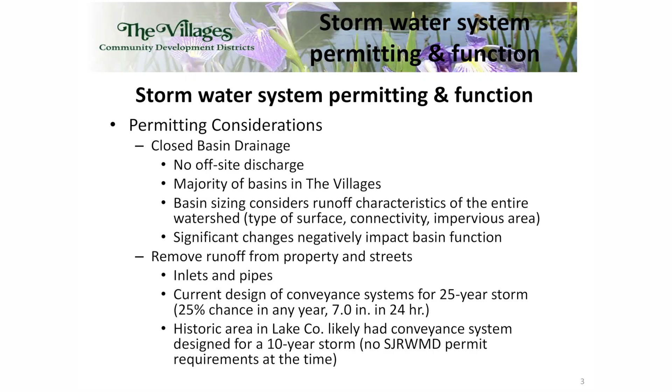The historic part of the villages in Lake County was designed and constructed back before the Water Management District even had standards for conveyance systems. So the belief is that those systems were designed for about a 10-year storm. Because there weren't standards, that was the practice of that day. So those older systems can behave a little bit differently, not because there was anything wrong. It was just back in the 70s, and the way things were designed was just different.

Moving on to storage, the primary purpose of the storage is to protect properties from flooding. And so the way that those are designed is the engineering team will look at what's called a 100-year storm. That's a storm that has a 1% chance of occurring. So you could feasibly have multiple 100-year events in any given year. It's unlikely, but that is a storm that has about 10 inches of rain in about a 24-hour period.

Now, if you look at the St. Johns side, that's Lake County and also up in Marion County, it's a little bit different storm. It's a 25-year, 96-hour storm, and that's about 11 inches. So those are the amounts of rainfall that are considered when the basins are sized, so that if we have that kind of event occur, the retention basins will be able to store that water and not have any kind of flood impact on the properties within the community.

One of the things that does happen, that was a design intent: if the developer and the districts were to have built only what I'd call primary storage, those basins that look like the water retention system, if all of the storage was to occur in just those basins, they would have had to have been much, much larger. And so it would have completely changed the economics and the way that things were built and designed.

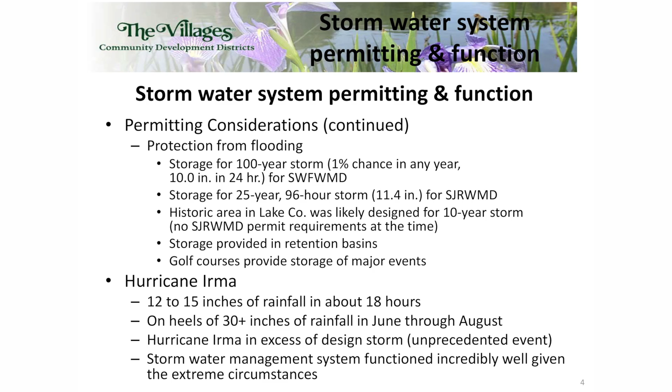So with all that, if you look around the community, if you were able to get out and see what occurred, the stormwater management system really functioned incredibly well. There was no widespread flooding. You saw some areas around the state where there was significant flooding that occurred on properties. As far as the district is aware, no water got inside the primary part of anyone's home.

There may have been some water right up next to someone's porch, but given the circumstances that occurred, it was really a very successful experience. The system functioned much, much better than it was even designed to do. So we were very, very grateful for that. The next couple of slides just show some pictures of what happened.

Basins were overfilled, right? They had overtopped the bank. And so that impacted plant material. One of the things as we've talked to the district is we're going to have to consider, when things are relocated, where's it going to be appropriate to replant materials? Where's a proper place to replant as we deal with some of the materials that were damaged through that event. It may impact the type of materials that are replanted in those areas.

And one of the things, kind of a side note, we're going to talk about water use permitting in just a minute, but when you're dealing with permit compliance, from a water management perspective, the conditions of your water use can affect what you're able to do. And so if you think about the time frame before June of last year, it had been extremely dry, right? All through 2016 and through the early part of 2017, it was extremely dry.

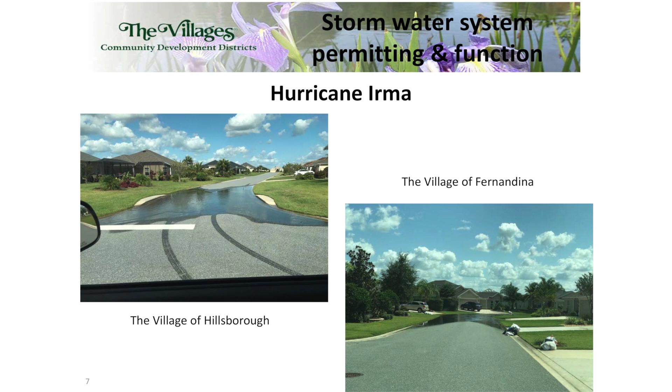And then finally, we had a few areas where the water actually backed up out of some inlets in our streets and impacted some roadways. That happened in Village of Hillsborough and Fernandina in Districts 9 and 10 in a small area. It happened in District 4 in the Village of Chatham, and as well in the Hickory Hill Hammock area in District 1. So just a few areas, but essentially with that severe of a storm, we did have some areas that backed up. But I wanted to show you, because there were some questions that came out about that.

And what's important to see is the way everything's designed around the community is if you were in that circumstance, which in some areas of the Villages we were after Hurricane Irma, what's going to happen is the water will back up, it'll come out of the inlets in the streets, and the streets, the golf courses, and your yards are going to be impacted by the floodwater long before your home. All of the finished floors of the homes are set well above those street elevations, and so there's a lot of area for the floodwater to spread out, but there was definitely some concern about what would have happened or what could have happened.

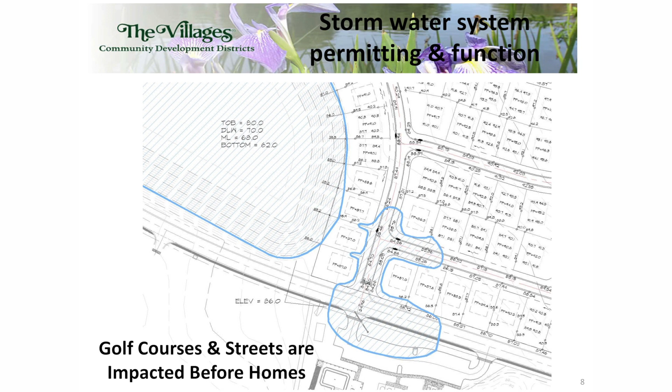The second area we want to cover is talking about stormwater as an alternative supply. When you're building a community like the Villages, one of the things that's very true from a permitting standpoint is what we're doing, the way things are designed and built, can't adversely affect the environment. So when it comes to our springs and wetlands and the things around Florida that make it a beautiful place, our water use can't negatively impact those things.

And so from a water standpoint, the water use permit sets the quantity of water that we're allowed to withdraw from the ground, from wells, and then use it for whatever water use purposes there are. The permitting requirements force you to use the lowest quality of water that's available first. And so the hierarchy of use is stormwater, being the lowest quality, is the first primary water source that is used in the community. And then moving up the chain is reclaimed water or reclaimed wastewater.

And then finally, when those sources aren't available, groundwater is used. And again, the water use can't have an adverse impact on the environment. So when all this was being designed and planned and the basins were being looked at, considering what can be done to maximize the use of that alternative supply was a huge consideration.

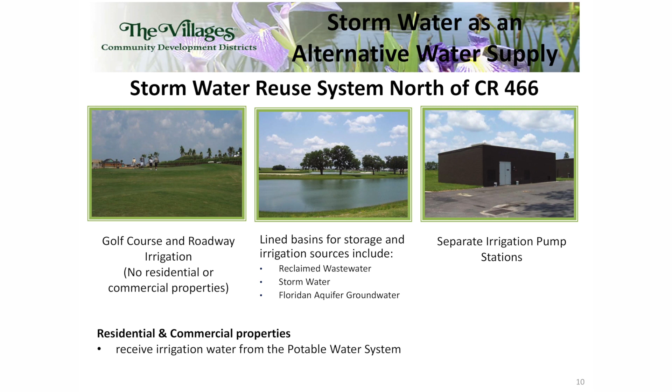And so stormwater is collected in all those retention basins. We use stormwater, reclaimed water, and groundwater, again, sort of in the hierarchy of use. And then there are separate irrigation pumping stations that will deliver that water out to whatever the particular use is. From a residential and commercial standpoint, all of the irrigation is from the potable water supply. So if you live north of 466, the irrigation on your lawn is the same as the drinking water. But some of the separate areas like our golf courses use a different supply that is utilizing stormwater.

Now one of the questions you might ask is, why is it different? As you move from the oldest parts of Lake County, into districts 2, 3, and 4, and then eventually south of 466, just like everything in our lives, as you move through time, you have innovations, you have things you understand better, and in the way that the design and the engineering was accomplished, things were learned, systems were developed, and the system just got better and better as we moved through.

Recently on the transportation side, if you recall, some of the paths north of 466 were narrower, right? They were built differently. So we've gone back and made some enhancements to those to take some of the things that have been learned. Now from a stormwater standpoint, to go back and install the type of system we have south of 466 would be extremely cost prohibitive. But it's important to understand the innovations kind of happened over time. So there's a significant shift in the way things are managed north and south of 466 with respect to stormwater.

So the next couple slides are talking about stormwater reuse south of 466. We have a separate non-potable irrigation system that supplies irrigation water for everything residential and commercial. The only use that is not covered by this system are our golf courses, okay? And so to your home, you'll have a separate irrigation meter that brings non-potable irrigation water. The sources are going to be stormwater as our primary source, and then when we don't have adequate stormwater, we supplement it with lower Floridan groundwater.

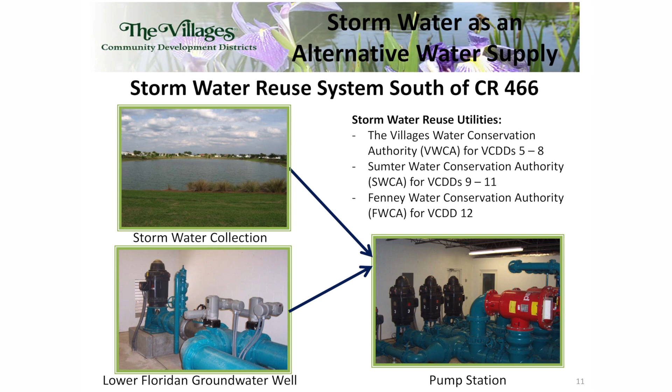One of the questions that has come up a number of times is, why does the irrigation water sometimes smell? The lower Floridan groundwater has been in the ground a much longer time and has picked up some additional things in it that you don't see in the upper Floridan. The primary odor contributor is hydrogen sulfide. And so when we're at a time of the year where the irrigation demands are relatively high and we don't have much stormwater, the water is pumped out of the ground, contains hydrogen sulfide, and then it's pumped very quickly into your irrigation systems. And so as the water sprays out of your irrigation heads, you'll smell that rotten egg smell, what hydrogen sulfide smells like.

So that's more than likely what you're experiencing when you have that odor coming out of your irrigation system. One thing I would point out, we've had questions over the years of, what should I do if I want to irrigate some vegetables, if you plant a little vegetable garden?

Because the irrigation system is non-potable water, the recommendation is always to use the potable system. So if you're going to plant a little garden, use the hose bibs on the side of your house. That is drinking water. The non-potable irrigation water is only connected directly to your irrigation system. So that's just kind of a little thing we'd like to make sure you understand.

And then kind of the third big point, the question we get a lot is, why are there times when the irrigation systems are running around the community while it's raining? If you remember, coming through Hurricane Irma, all of the basins were very, very full, right? Because we have this extensive stormwater reuse system, we also can use that system to help us recover when the waters are very high. And so there will be certain times of the year, certain years, where decisions are made to say, we need to dispose of excess stormwater.

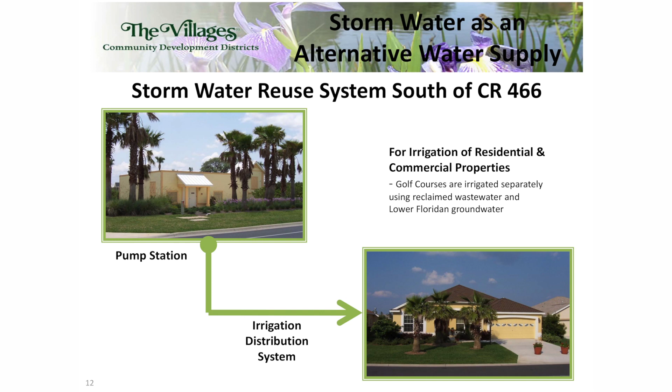So when that happens, some of the roadways, some golf course areas that are interconnected, we'll have them turn on and basically run 24/7 disposing of excess stormwater. So when you see that occurring, more than likely that's what's going on. The next slide kind of shows you, once we pull the water out of the retention basins, it essentially functions just like a normal water distribution system, running out up and down the streets and coming to your home or any commercial property.

A third area I'm going to talk about are just, what are all the types of basins around the community? We'll frequently get questions that say, why does the basin here look different than it does over here? So we spent some time and looked through all of the villages to do our best to come up with how many different types of stormwater retention systems do we have out there. And I'm not going to talk through them all, but there's 14 different ones that we were able to identify. And each one of those will have different characteristics, will function differently depending on what's happening.

And so, again, the point is there's many different types of scenarios. And each of those specifics will impact how it functions, how it responds to storms, what it might look like, when it is or isn't raining. When we have the breakout sessions after this main presentation, there's a series of maps that show all of the community, and you'll be able to look and ask questions. If you have a specific question about the basin near your home, you can look and see and ask some questions. Well, why does this function this way?

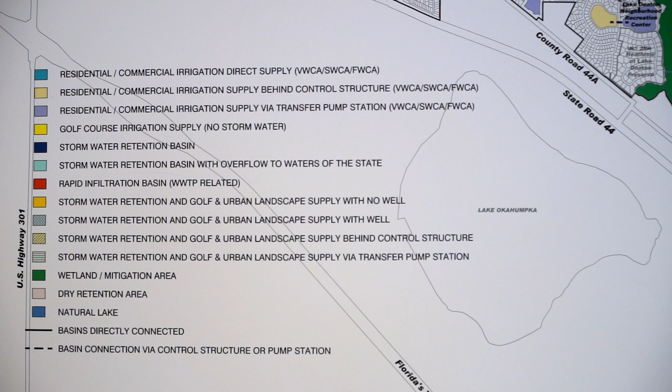This map is just a portion of the District 5 area in the north of Lake Okahumpka. And just on this one little segment of the villages, there are 8 different types of basins represented. So if you can see this, all the different elements on the map, and this is what you're going to see in the room next door when we have the breakout sessions, is the whole community kind of broken down like this. Up here in the top left, these dark blue basins, that's a type that is more what you might consider a traditional basin, where the water that comes into it or goes out of it is all related to rainfall.

On the map, you'll see the dashed lines kind of represent basin connections that are behind some type of control structure. And then the solid lines represent direct connections. And then each color of the type of basin will show you what type it is. So as you're looking at the maps in the next room, you'll be able to kind of get an idea of what you're looking at.

One of the comments that we'll get occasionally is, can you take water from here and move it way over here? And while there are some capabilities to move water around, which generally occurs within the basins that are connected to a pump station, there's not an ability to move water, for example, from the basin systems north of 466, south of 466, or from District 5 down to District 7. So within a particular area, some water movement occurs, but there's not long distance, broad transfer of water. The hydraulics just don't allow us to be able to do that. That's a common misconception that we'll get from questions that come up.

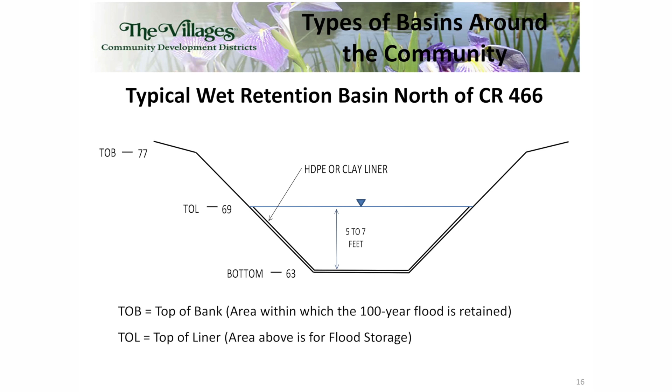If you move south of 466, remember there's a shift in the way we were looking at stormwater management, and we have the separate irrigation system, the separate non-potable system that relies heavily on the use of stormwater. So in the design and construction of these, some extra liner was added. There's a normal depth of water, maybe 5 to 6 feet for aesthetic purposes, and then another 2 feet of liner was added above that to be able to collect, store and use excess stormwater to help offset groundwater demand for the environmental benefits of that.

Now what happens if the level of the basin is above, you see on the slide where it shows ML, that's management level. When it's above 58, it's just available excess stormwater that we're using. So no water is being added in. But if you're down at 58, to where all of the excess stormwater has been used up, that's the point where we start adding groundwater in each day to help recover the amount that might have been used for irrigation purposes.

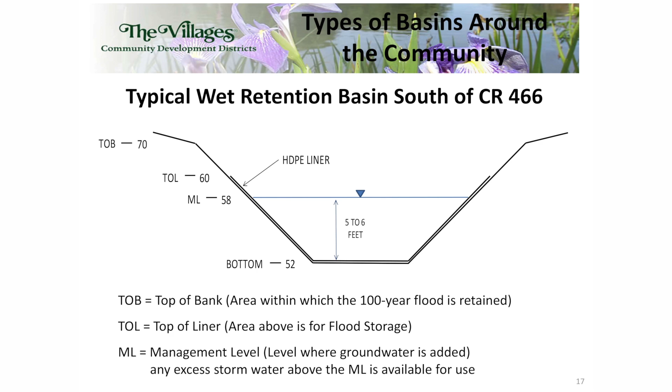And then other systems will be at higher elevations. You can't directly connect them, right? What would happen if they were directly connected? All the water is going to run downhill. And so you'd empty one system and you'd overfill the downhill system. And so there are controlled valves between those.

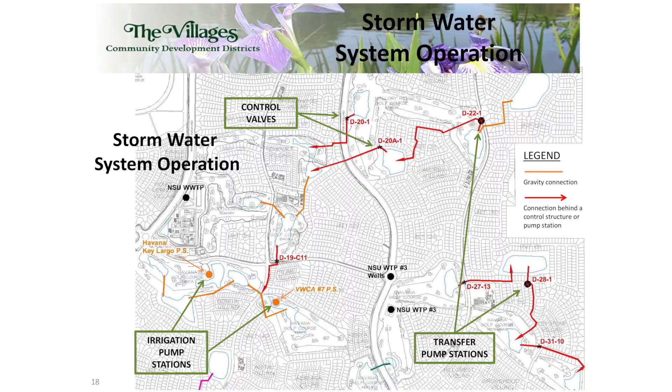And so if you have a circumstance where there's water stored that's in excess of that management level, we have stormwater available to use, and the downstream system has available storage, then the operations folks can go out, open those valves, and move the water downhill. Again, the point is always what can be done to maximize the use of that available resource, that alternative water supply.

Decisions always have to be driven primarily by our water use permit requirements. So if we have certain amounts of water that we're allowed to use for whatever the purposes are, we have to maximize the use of stormwater first, and then after that we're able to use the groundwater to make up for those needs. Now whenever possible, we do look at aesthetics. So decisions are made by the operations folks to say, is the water needed right now, or can it be timed differently? But ultimately, water management and permit constraints drive all those water management decisions.

One of the things that happens to us when you have a more severe event, like Hurricane Irma, the villages didn't know for sure that we were going to be impacted by that hurricane until just a very few days out, right? There were some predictions that it might have been coming this way, maybe a week and a half or so out, but even up to the last day or two, was it going to turn and go up the east side of Florida? Was it going to stay out into the west? And so all of those considerations have to go into how we manage those available resources.

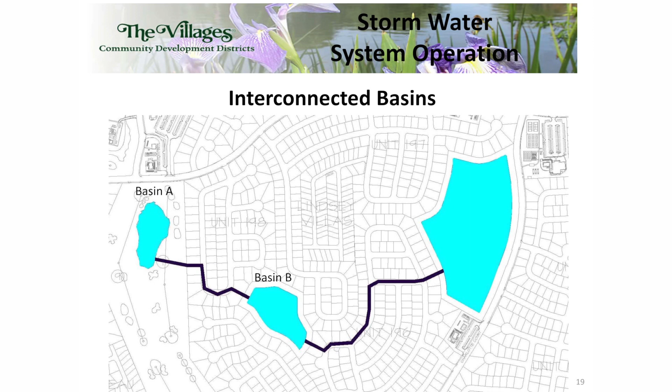The next picture shows you there's many interconnected systems, and this is, again, a question that comes up. The reason the systems are interconnected is to allow us to capture and use more of the available stormwater. And those connections are by gravity pipes between a lot of the systems. And this next slide shows you what that might look like. And we wanted to just talk through briefly how those interconnected pipes can have an impact on things, right?

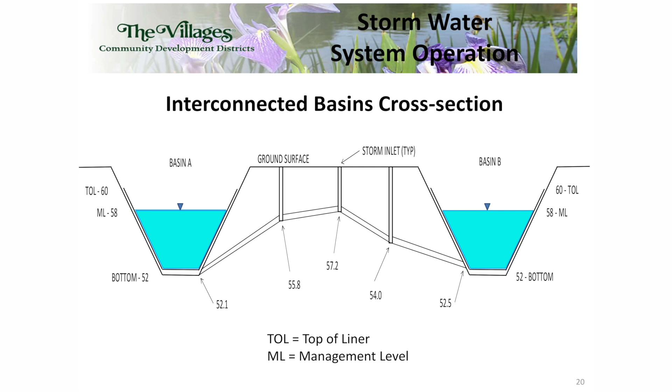If you're looking at this, these two basins, Basin A and B, are directly connected systems by underground gravity pipes, but the elevation of those pipes between those systems can impact how it functions. If you look in the middle of that, there's a high point in the gravity connection system of 57.2. So if the water level is above 57.2, those two basins are going to function exactly the same. They're going to rise and fall together.

But if it's a dry time of the year where, you know, it's May and the levels in those basins have fallen down below 57.2, they're going to disconnect and each basin is going to act independently. So depending on how they're connected, what elevation the pipes are at that are connecting the two, can all impact how they function on any given set of circumstances.

And then the last area we're going to talk about briefly is stormwater basin maintenance.

There's three areas we're going to cover. First, with respect to water quality. When it comes to the stormwater retention basins, water quality is the responsibility of the district property management folks. So they're the ones that go out and will treat nuisance plants or have them removed or deal with algae. There's some constraints when you're dealing with chemicals and putting them in a surface water body. There's only certain things that can be done.

So the district property management folks are looking at how do we best manage the water quality, both from an aesthetic standpoint and from the ability to use that for irrigation. Now when you move outside of the water and you look at the banks around the stormwater retention basins, the way that those are maintained is typically determined by who owns the property. So if it's adjacent to a golf course or if it's within one of the numbered districts, that will direct who's handling the landscaping, who's handling the turf maintenance, who's handling cleanup of any kind of debris that might be accumulated on the bank, removal of trash.

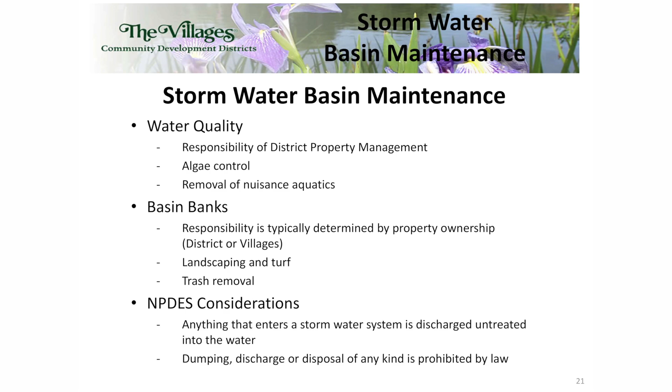And then finally, NPDES, a long acronym, but basically what that is is a federal program that requires proper management of the stormwater quality. So it's against the law to dump things into the stormwater system that are not rain. All of the district personnel have information and they're informed to keep an eye out for that, to have nothing other than rain make it down those drains. Because anything that goes into the retention collection system eventually makes its way to those ponds and can affect the fish that are in there, the birds that might be feeding on those basins. And so protecting the water quality is a very important element of the maintenance of that basin.

The next slide just shows you a couple examples. This is again in District 5. Some of the basins that are on the Palmer Golf Course, the water quality is maintained by Sumter Landing Project Wide, but the areas around the basins are maintained by Golf Management Solutions. And then over to the left, the areas that are within the district are maintained by Sumter Landing Project Wide. The water quality, as well as through the agreements of all the numbered districts, the areas surrounding the basins are maintained by the project-wide group as well.

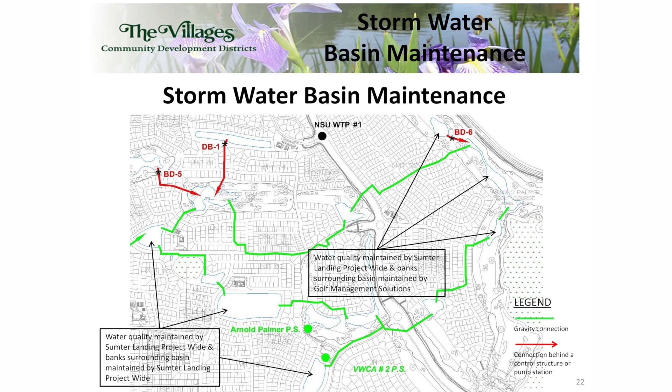And so just to wrap it up, from a permitting and function standpoint, the important things to take away are the idea of closed basin drainage and how that affects the way the systems work. The fact that by and large, the systems are designed for a 100-year storm, but in some of the older parts of the community, those permitting guidelines weren't in place. So that affects how things function. And then finally, the idea that the golf courses were designed to flood. In the event of those extreme storms that can come, the golf courses are supposed to do what they did.

From an alternative water supply standpoint, the goal is to minimize the use of groundwater because it helps protect all those environmental resources. It allows for the development and operation of a community of this size without having any adverse effect on things like Lake Miona, Lake Deaton, Fenney Springs. All of those things are being protected through the way these alternative water supplies are being used. With respect to types of basins, many different types. So we'd encourage you in the breakout sessions to just ask some questions if you have them.

Things shifted north and south of 466. We went from a system to the north where we recover stormwater, we use it to the extent we can on golf courses and some roadways, to south of 466, a completely separate stormwater reuse system that goes to every home and every commercial property. So a big shift in the way those basins function.

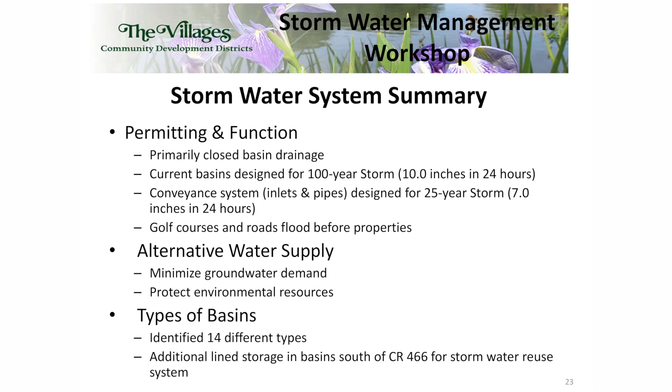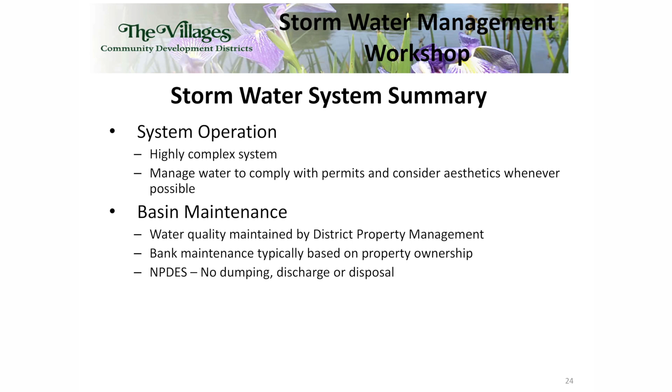From a system operation standpoint, very complex. A lot of decisions have to go in. And we don't live in a perfect world, right? So things can happen that you can't predict. And so the staff does the very best job they can to try to manage those aesthetic concerns while complying with permit constraints and all of the regulatory things that affect this community. And then finally, from a basin maintenance standpoint, water quality, district property management. If you see some issues with respect to algae, they're the folks to contact about that. And then maintenance of the banks around is typically handled by the property owner, whoever that might be.